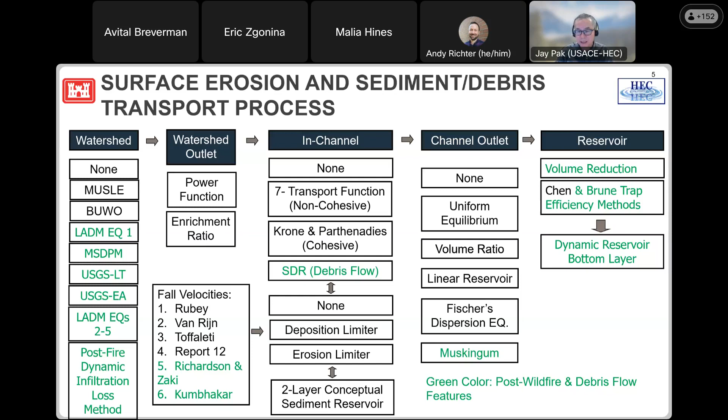And then we can update the elevation-area, elevation-storage curve every time step. Then we can continuously update our volume reduction for reservoir capacity. Okay, that's the overall process. Let me go to the data side.

Data: to simulate post-wildfire debris yield and post-wildfire hydrology, you need rainfall data. You also need topographic data and a soil burn severity map; normally you can get that from the BAER team. Then the soil gradation curve, specific gravity, and density. Normally you can find this information from an actual sample at your site, but if you don't have a chance, you can use gSSURGO data to estimate these values.

You also need gauge data, pre and post, for calibration and validation. And finally, you need the measured debris amount for your debris yield analysis, calibration, and validation. Using this data set, you can fill out the required input parameters.

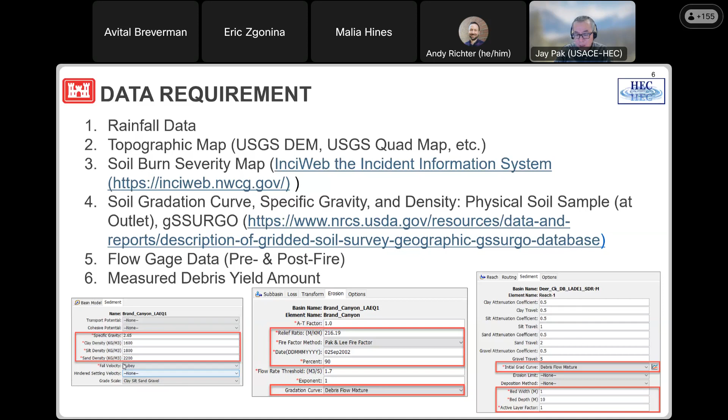From the basin model, go to the sediment tab; you need specific gravity and density for each grain size. For the sub-basin element, in the erosion tab, you need to put the relief ratio, the burn percentage, and the burn date. You also need to put the gradation curve; normally you can find this sample from the outlet of your watershed. Then for the reach element, in the sediment tab, you need to put the reach element gradation curve and also some cross-section information.

How do you get this data? You may have a lot of sources, but I want to recommend this NASA RECOVER site as one-stop shopping. This is a new site developed by Idaho State University and NASA. You can find all the information here: fire maps, terrain data, gSSURGO information, and even rainfall information.

This is a recent fire, the Maui, Hawaii fire. They only cover the continental area, not outside the continental U.S., but I asked them, and they generated the Hawaii fire information too. Check this site first to save your time, and if you don't find the information, then you can go to another source.

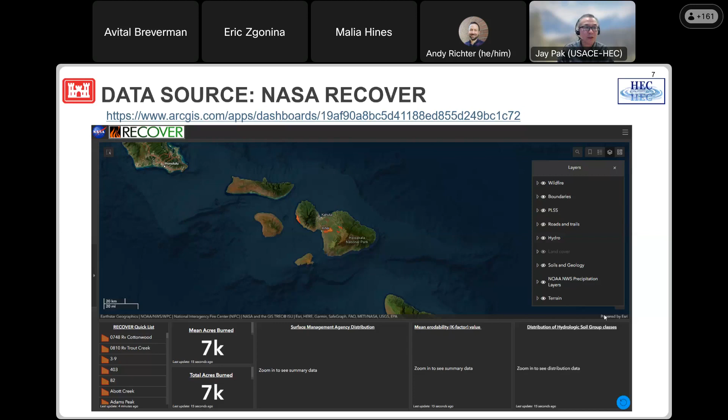This is the GUI for debris yield. If you want a debris yield analysis, go to the sub-basin tab and choose one of the debris yield methods. After you choose one, HEC-HMS generates a specific interface for each method, and you need to put the required input parameters for each method. Then HMS generates the results. This result graph shows sediment volume, sediment concentration, and sediment load, and HMS also generates a summary table.

With this, you can generate input boundary conditions for HEC-RAS. HEC-RAS has two options. You can use bulk flow, which means water volume plus sediment volume, so you can directly link this time series DSS result. Also, from the summary table with water volume and sediment volume, you can generate a bulking factor and put it into HEC-RAS directly.

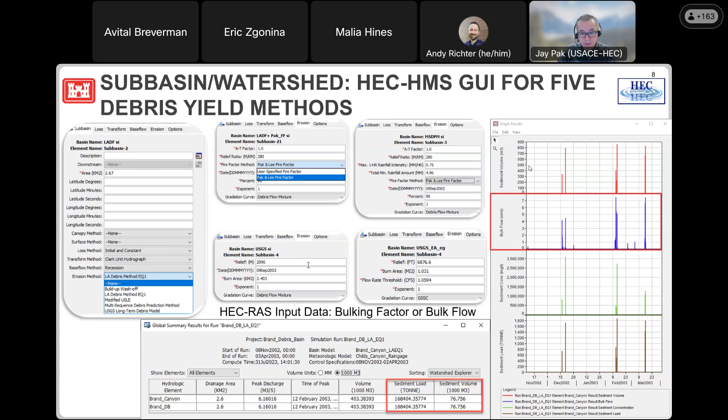The next one is the reach element. Originally we have seven transport capacity functions, but they don't work for hyperconcentrated systems. That's why we need a simple but manually controlled erosion and deposition, especially in steep channels inside mountain watersheds.

This is a simple concept. You have your input sediment amount for your reach, and you can control the sediment delivery ratio to get the outlet. If you choose 1 for the sediment delivery ratio, input and output sediment are the same, an equilibrium condition. Less than 1 is a deposition condition, and bigger than 1 is an erosion condition. That's how you control deposition and erosion inside your channel.

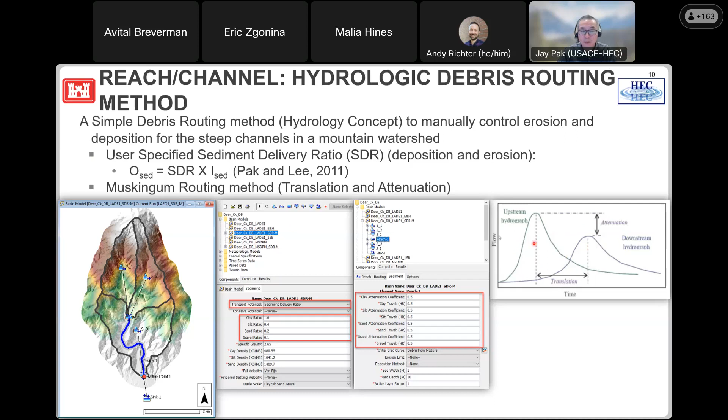This is the interface. Let me use the laser pointer here. In this interface, you can choose the sediment delivery ratio for each grain size to control the volume. After controlling the volume, you want to control translation and attenuation. You can easily control the Muskingum routing method with two factors, the attenuation coefficient and the travel time. So you control attenuation, translation, and volume with this SDR and Muskingum debris routing method.

Next one is the reservoir element. You can see this big picture here: this is the San Bernardino County Deer Creek debris basin, with the debris basin intake tower inside the basin. That is after the fire but before the storm event. After the Christmas storm event, you can see a huge debris yield already filled this debris basin.

We need to simulate this one with HMS, okay? For a large watershed, a large reservoir, this is one example. Horizontal is time, vertical is reservoir volume. Through time, by siltation, reservoir capacity is reduced. But after fire, reservoir capacity is dramatically reduced.

Normal time, and then after fire. During this whole long-term time with the fire, the reservoir is going to lose some capacity. Then we have to raise the dam, or we need some kind of flushing or dredging. But we want to do some simulation with such a model.

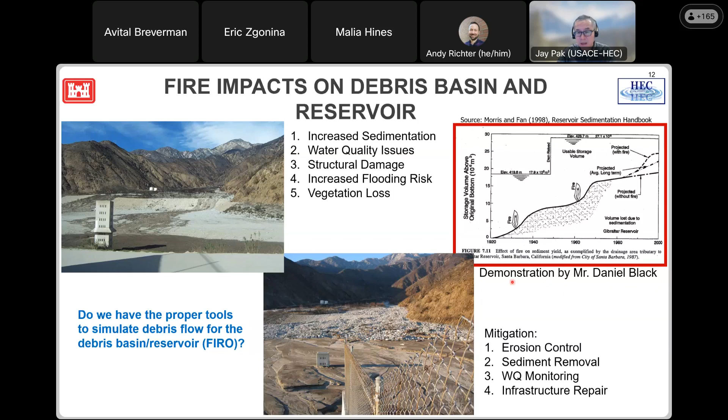Okay, I think Daniel Black is going to demonstrate first for the long-term big reservoir. Unfortunately, in this case study we don't have a fire event, but you can see how this reservoir element works in terms of volume reduction of capacity. This one is the process.

HEC-HMS calculates trap efficiency with the Chen method or Brune method. With that, we can compute the siltation amount and then the updated elevation storage and elevation area curve. With the updated elevation area curve, we can calculate critical velocity and get the updated Chen trap efficiency. With this process, we can continuously update the elevation area and elevation storage curve.

On top of that, we have 2 options for how to update this elevation storage curve, okay? The first one is a V-shape option, meaning it deposits from the bottom. The second option is the elongated taper option, which deposits from the upstream.

For example, this solid green line is prior to siltation. If you choose the V-shape, the dotted green line loses capacity from the bottom. But if you choose elongated taper, like the yellow solid line, you lose capacity from the upstream. You can choose this option by grain size, and then control your elevation area and elevation storage curve to update your reservoir.

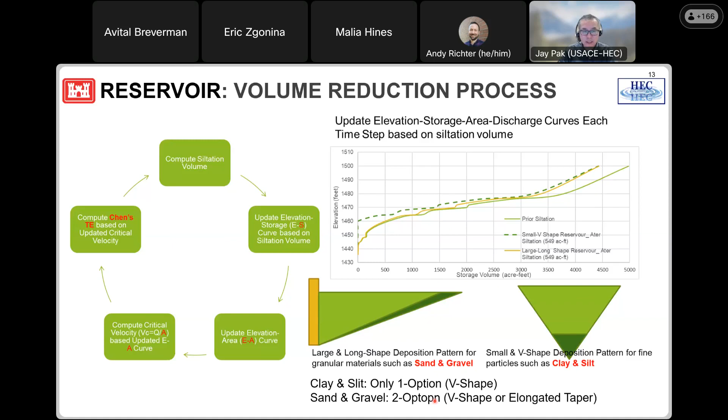Okay? This is the user interface for the reservoir. You can choose Brune trap efficiency or Chen trap efficiency from the sediment method. Each method has its own component editor. You need the required input parameters, and then HEC-HMS generates cumulative debris yield or sediment yield, and the elevation area and elevation storage curve updated monthly.

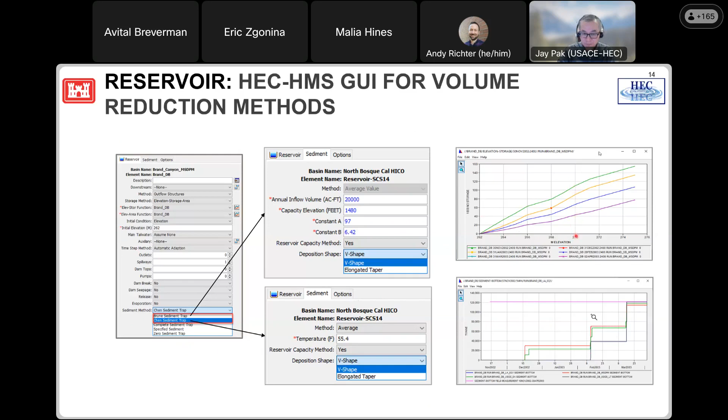Okay, this is one example. We're using 4 different debris yield methods, and with that, HEC-HMS generated the cumulative yield through the whole storm season of about 4 months, and this orange solid line is measured data. Everything is pretty close to the measured, but they differ by event. This one is continuous accumulation information.

Another graph here is the elevation storage curve. The first one is the initial storage curve, and the last one is the final one. We provide the updates monthly. For elevation 270, the original capacity was about 110,000 cubic meters, but after three and a half months, one storm season, you have only 45,000 cubic meters. This much you lose already.

So with this information, you can control debris basin management for future debris yield events based on forecasting information.

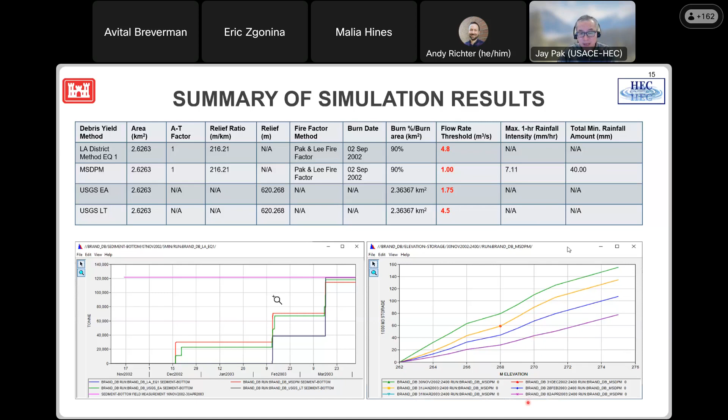This one is the ensemble analysis tool. Many people ask which method is best. Without data to calibrate and validate, it's hard to say which one is better. Normally, in an emergency situation, we don't have a data set for calibration. So as an alternative, you can use all 4 debris methods, and then use the ensemble analysis tool to provide a maximum, mean, minimum range. You can provide this range to HEC-RAS for your non-Newtonian simulation.

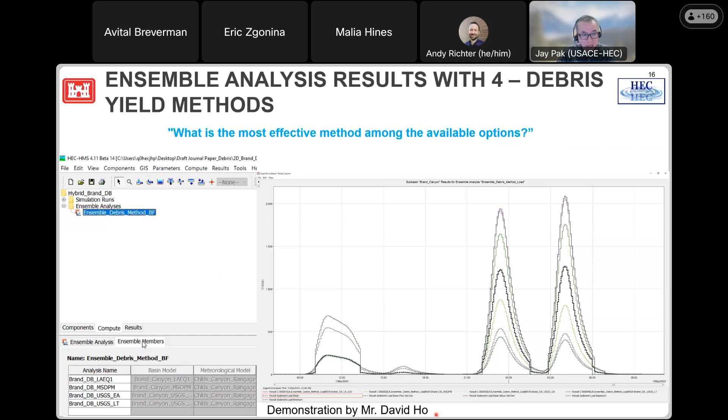David Ho is going to present in more detail with his case study. And this one is another application with HEC-HMS 2D. I connected the maximum debris yield as a bulked flow into a 2D boundary condition, and then generated inundation mapping. But this one is just for clear water.

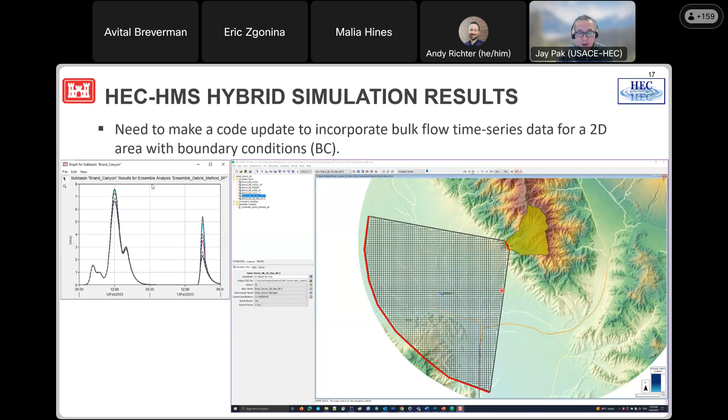It's not non-Newtonian. But before using HEC-RAS, you can get some idea with trial and error, finalize your alternative, and then go to HEC-RAS and make a final non-Newtonian simulation to get your final boundary line for your debris yield.

Okay, the next one is the dynamic infiltration loss method.

This graph I got from the 2020 Brian Ebel paper. After fire, he took some measurements of hydraulic conductivity. The first one right after fire, and the second one 4 years later. You can see that hydraulic conductivity increases from the fire up to a certain unburned condition.

We want to simulate this for long-term post-wildfire hydrology. That's why we add one surface layer to control dynamic infiltration, using this dynamic infiltration loss method. This Ks initial is the initial value just right after fire. But with the decay factor it's going to improve up to the unburned condition hydraulic conductivity. This decay factor is a function of burn percentage, a function of time, and also a function of event. So with these three parameters, the decay factor increases up to the unburned condition.

Let me show you an example here. The red one is with the dynamic infiltration loss. The bottom one is without dynamic infiltration loss, up to 9 years. You can see the first year is pretty close, about 0.77 and 0.7. But through time, without the dynamic infiltration, the Nash-Sutcliffe coefficient is pretty low. But this one is still not bad. 0.2 is not good, but still much better than without dynamic infiltration loss.

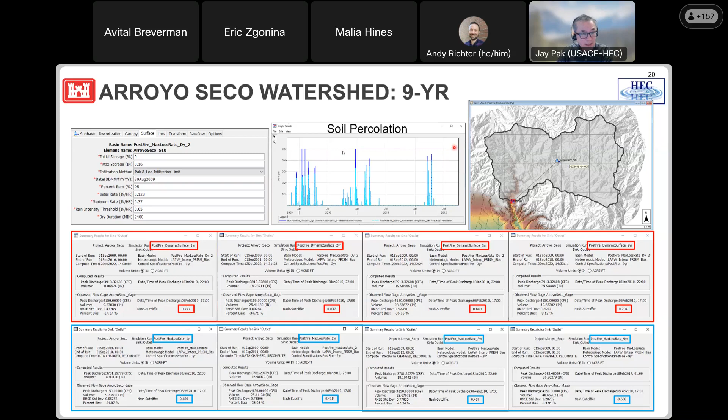Future plan. This year I'm concentrating on this new feature, because for post-wildfire hydrology many people use the curve number loss method, since we have a good guideline from the USDA Hydrology Technical Note number 4. They provide the curve number before fire and after fire, and even after fire they provide minor burn, moderate burn, and severe burn. Many people use that guideline to generate post-wildfire hydrology. But that is not site-specific. That is not physically based.

That's why our soil scientist from CHL, Dr. Shillito, and from DRI, Dr. Berli, suggest this modified Green-Ampt. Modified Green-Ampt just replaces the wetting front suction. This is the original Green-Ampt. They want to replace the wetting front suction value with the sorptivity value using the Philip equation. After replacing it with the Philip equation, we get a new modified Green-Ampt method. That's a function of hydraulic conductivity and sorptivity.

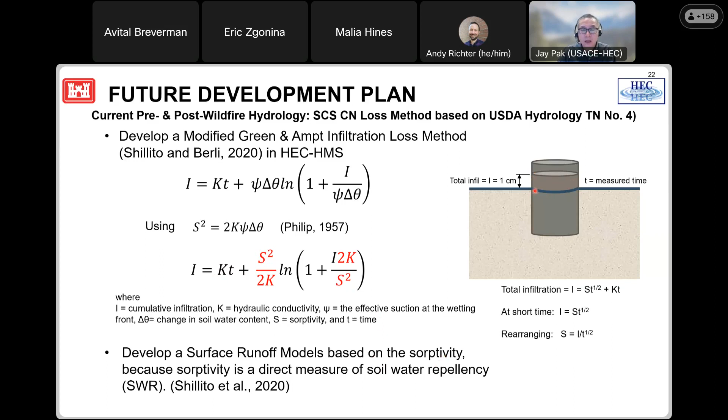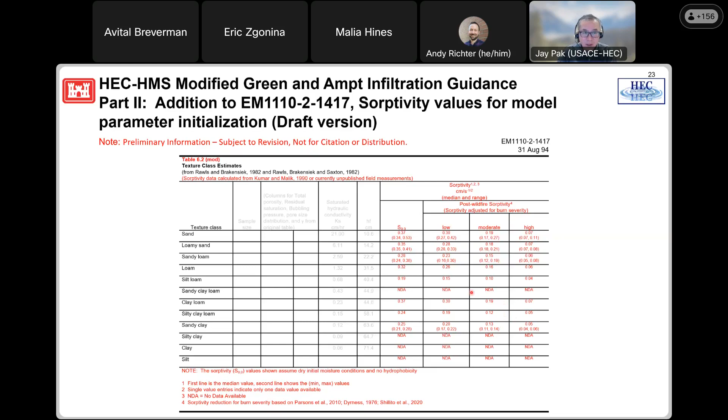Dr. Shillito and Dr. Berli are trying to provide some guidelines based on different soil textures, with a range for the sorptivity value. This is the unburned sorptivity value. This is burned, with different categories: low burn, moderate burn, high burn. But this is still under construction; they're trying to update it. With that, we can provide another alternative way to calculate post-wildfire hydrology and compare with the SCS curve number approach. I think this is my last slide.

Next, Daniel is going to present the dynamic volume reduction application for reservoir long-term simulation, and then David Ho is going to present the ensemble analysis application. So Daniel, I want to hand over to you. Thank you, Jay.

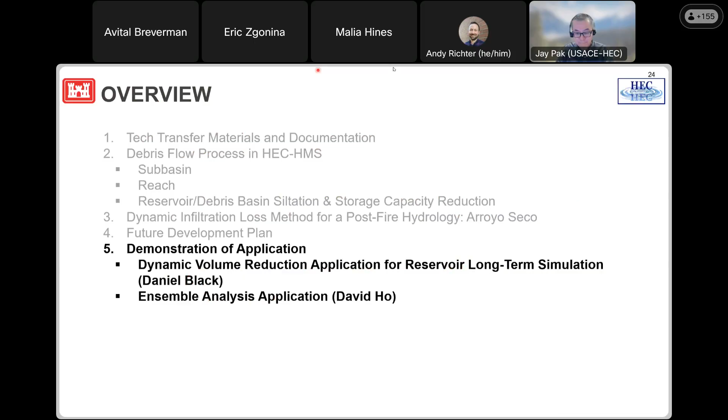So I am going to demonstrate some of the updates that Jay was just talking about, particularly the dynamic reservoir volume reduction feature. What we see here is a very simple HMS model. We have a source element, a reservoir element, and a sink element. We're going to open the component editor for the reservoir, and you can see the sediment method is set to the Brune sediment trap, which Jay was just talking about.

Going to the sediment tab, we can see the component editor for this method. We have these parameters to provide, and two boxes to choose a reservoir capacity method and a deposition shape. The reservoir capacity method is a yes or no option. Setting it to yes will update the elevation-storage as well as the elevation-area curve each time step based on reservoir sediment deposition, and allows you to choose a deposition shape. As Jay was showing, we have V-shape and elongated taper.

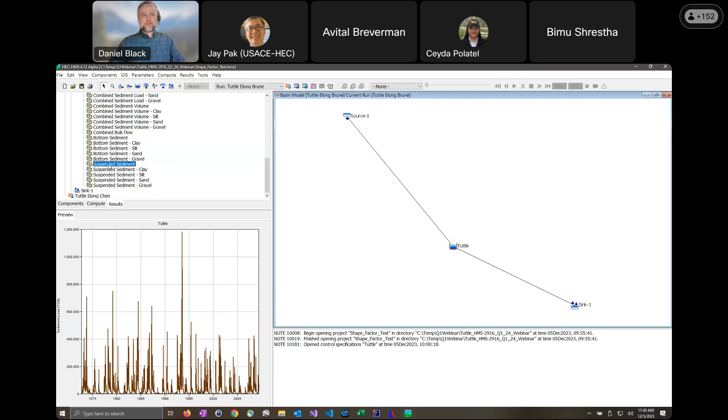The more important ones that we're looking at are the bottom sediment. This is the sediment that gets accumulated at the bottom of the reservoir over time. This particular simulation is a long period of record running from 1972 to 2009, and you can see the accumulation of sediment over time. And then finally, the suspended sediment. This is sediment that is suspended in the column after deposition occurs. This sediment will eventually become outflow or additional deposition given enough additional time.

So we're going to look at the results a little more closely. So I'm going to pull up the DSS file for this simulation. And I'm going to filter down to elevation storage. And here are the results for our elevation storage. I don't know if you can make out the text here. Each record is a 1 month period. Results are calculated monthly by default in order to prevent inundating you with data. A 1 month time step is plenty for looking at reservoir volume reduction.

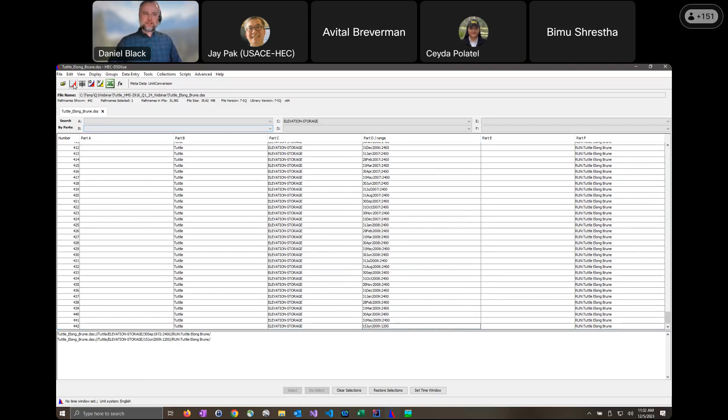So in this case, I'm going to select the first record from 1972 and the last record from 2009 and plot. The green line is our 1972 curve. The red line is our 2009 curve. The x-axis is the elevation given in feet, and the y-axis is our acre-feet storage. So if we look at a point here, say 1,100 feet, we can see that in 1972, our storage was about 909,000. And in 2009, our storage is around 732,000. So we can see that over time, our storage volume is being reduced.

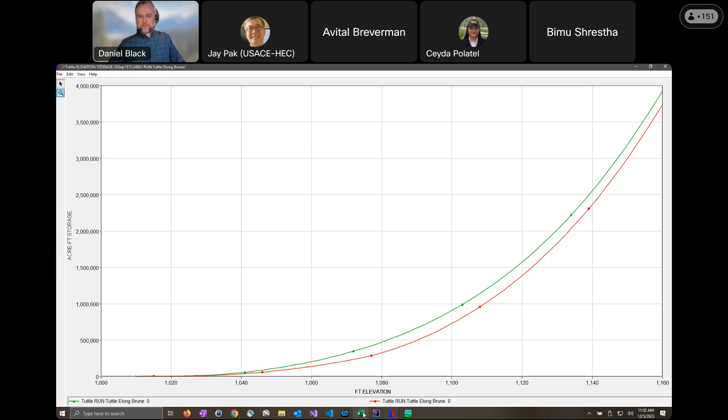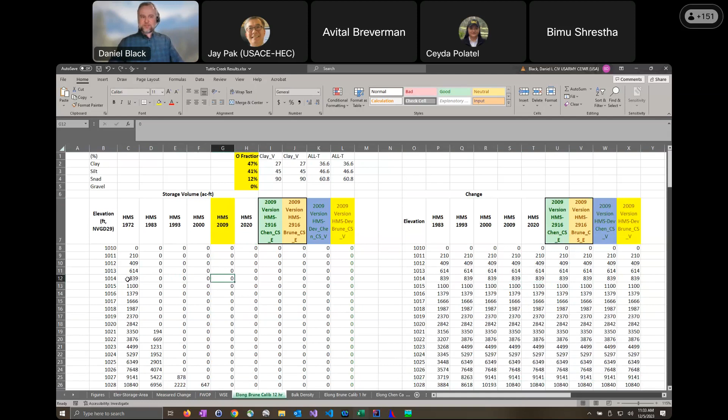Now we're going to look a little more in depth at the data. So I have a spreadsheet. Again, I don't know if it's large enough font to read, but we have two tables. The first table is our elevation storage curve based on survey data. So we have the 1972, 1983, 93, 2000, 2009, and 2020 surveys. And the second table over here is the change. The change is calculated for a given year by subtracting the 1972 volume from whichever volume you're looking at the change for. So in this case, let's say 2009, we would subtract 0 from 839. So that's where this data is coming from.

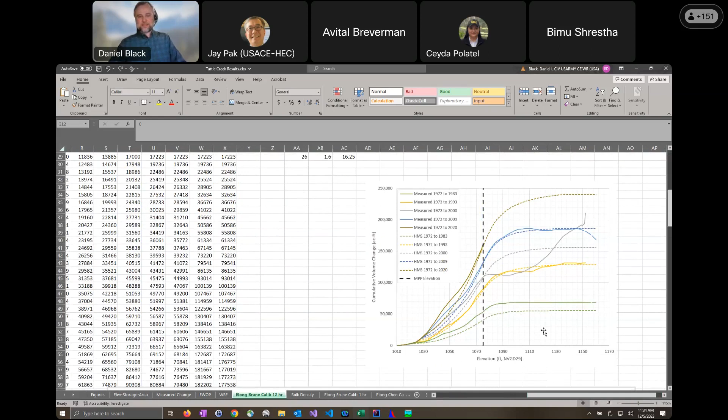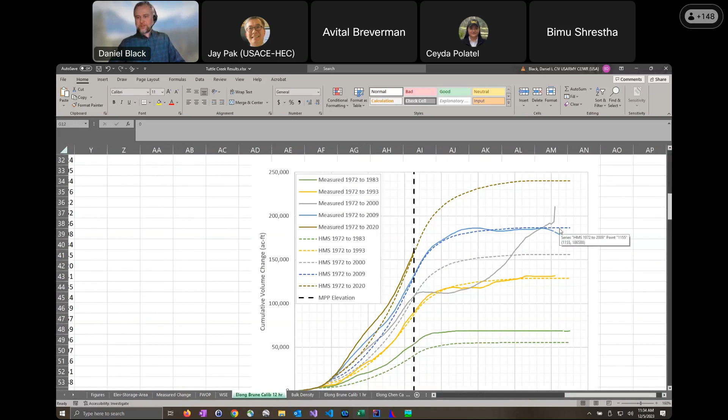This particular graph is just a plot. Let me zoom in a little more on that. This is just a plot of all of the data in the columns we were just looking at. And we're going to focus on the 2009 curve, which is the one in blue here, because that's what our simulation was showing. And let me change this. Okay, so this is our 2009 simulation. And the first two lines that we're going to look at are the blue and green lines over here.

These represent using the current method that's in HMS, the deposition shape, where the elongate method is only depositing sand and gravel in an elongate shape, and silt and clay are still using the V shape. And we can see that these lines do not match very well with the measured curve from the 2009 survey.

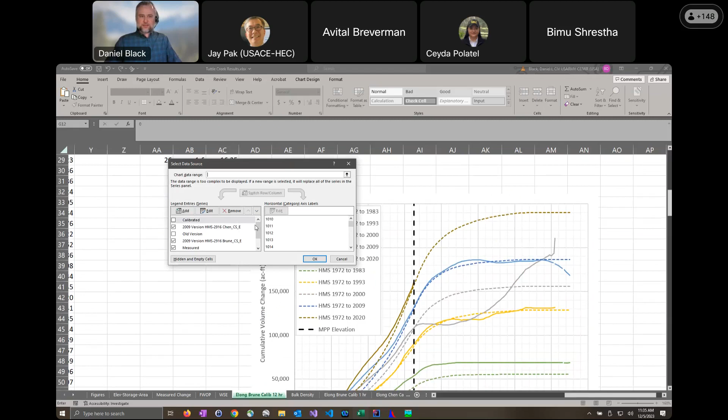So if we go ahead and turn those guys off, so now with the updated code that we are testing out, in this case, the elongate shape, all grain sizes are using the elongate shape, and so the orange line here represents using the Chen sediment trap method. The yellow line represents the Brune sediment trap method, and the green line is our measured actual surveyed data.

And what this shows us is that, with the proposed changes, we are seeing a much improved matching of simulated with observed data. This backs up the idea that having the ability to model grain sizes individually would probably further improve our calibration results.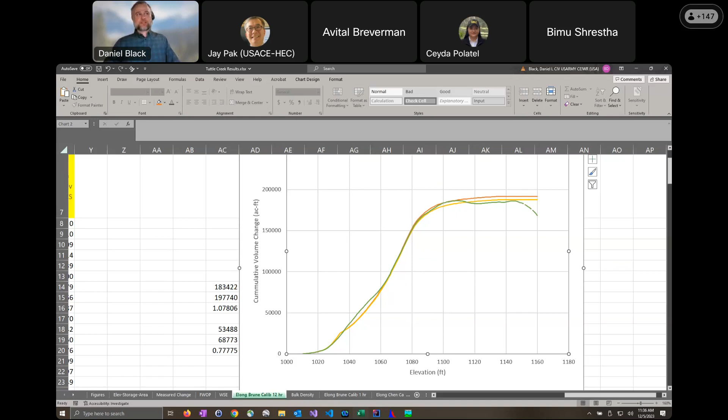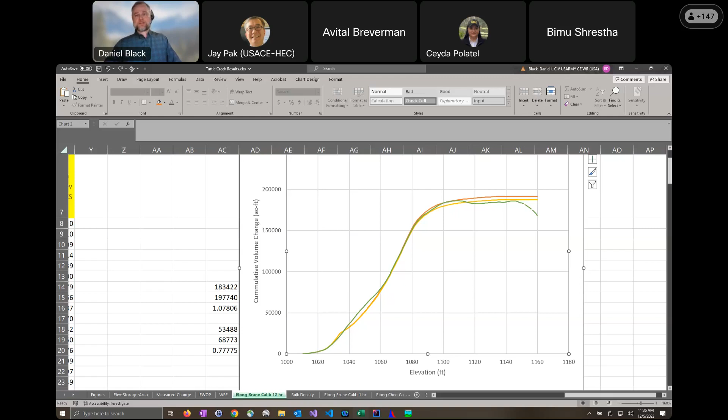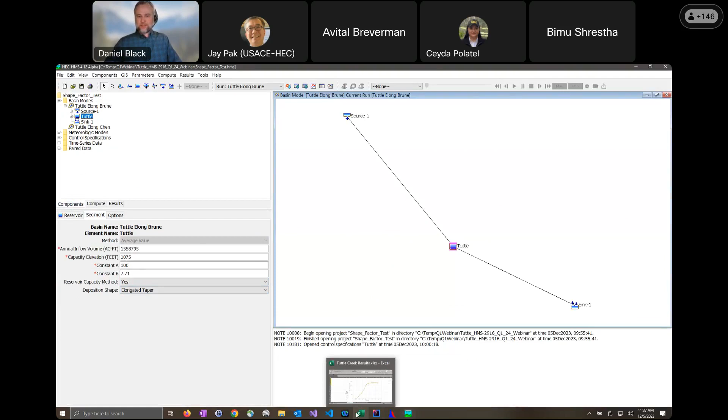So the key takeaways from this demonstration is that setting up the HMS model to model volume reduction is a fairly easy process. Going back to our component editor, this is a very easy component editor to parameterize. These results track very well with the results produced by HEC-RAS.

So I'm gonna pull back. This is not an actual table in here. This is just a screen capture. But the results in blue represent those produced by HEC-RAS. The gray represents HEC-HMS, and you can see that the results track very closely. So there is some advantage to using HMS, given how easy it is to set up the model.

Another important takeaway from this demo is that the model that I'm demonstrating, the long period of record, doesn't include post-wildfire sedimentation. So these improvements are not just geared towards post-wildfire. These can be used in any case that we have a reservoir that we need to model sediment on.

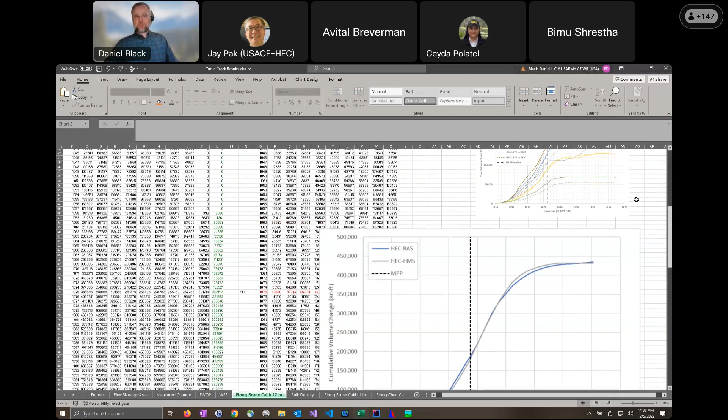And then finally, a lot of this work came about from needs from modelers in the field. Before these capabilities were added to HMS, modelers would have to use a spreadsheet kind of similar to what we're looking at now. Modelers preferred using spreadsheets over setting up a RAS model, and the issue with that is that even an Excel sheet can get kind of cumbersome when you're dealing with 60, 80, 100-year period of record.

So I mean, you can see this table here. It's annoying to look at. It's hard to make sense of. So HMS is a much more concise way of modeling volume reduction. So yeah, that's pretty much the end of my demonstration.

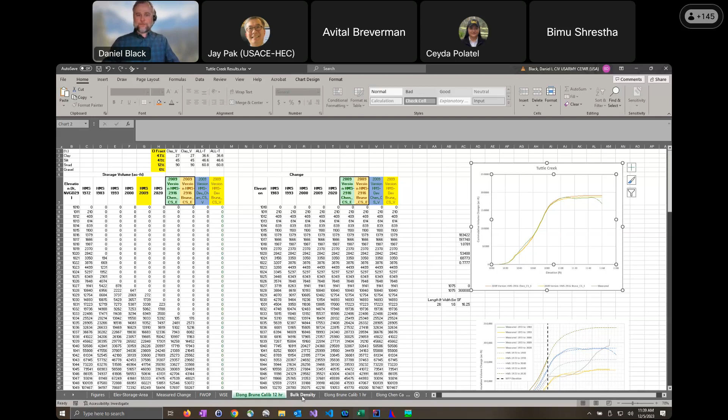All right, so hi, my name is David, and for my demo, I'm going to show how you can use the subbasin debris yield methods that Jay had talked about to generate a bulked flow hydrograph. So Jay had mentioned that we had debris yield methods that can be used to estimate debris volumes. So we can incorporate the debris yield volumes into our clean water hydrograph.

So this is useful if you need to estimate the potential increase in your flood after a wildfire event on your watershed, where previous ways of estimating bulked floods has been simply just to multiply your hydrograph by a factor. You can still do that in HMS, but we can also incorporate the volume of the debris into the hydrograph itself.

All right, so for this demo, I'm going to use the Brand Canyon watershed that's located in Southern California. We have this watershed as well as its tutorials and guides on our Confluence page. So if you are interested in following along after this demonstration, you can go into our tutorials and guide space. It's called Task 2 Debris Yield Modeling Without a Debris Basin. So everything that I'm talking about is actually going to be coming from this tutorials and guides.

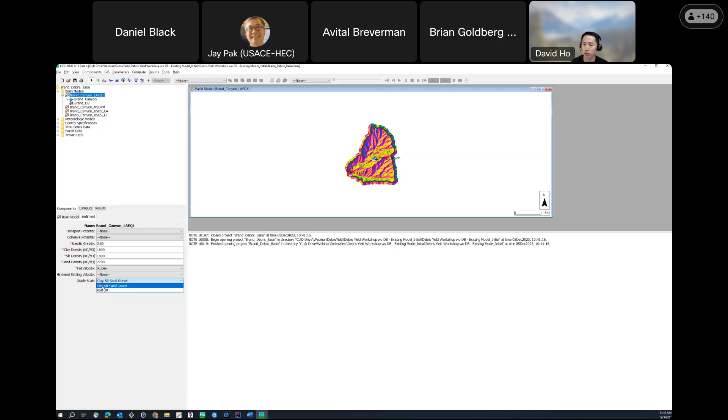All right, so next, we're going to head over to our subbasin, where we want to generate debris yield. So in the component editor, under the erosion method, we have all these different methods to generate sediment. And so we have methods like the modified USLE, which is a very popular sediment equation. Since we're interested in debris yield, I'm going to select the LA debris method.

And when we select that, we're going to have this erosion tab that shows up here. So I'm going to click on here, and here are the parameters for the LA equation 1. So each debris yield method will have its own set of parameters. Although if you were to cycle through the different parameters, you'll see that it's pretty consistent with one another. Our user's guide goes into much greater detail on what each of these parameters means. I'll go into some brief description for the LA equation 1.

So this AT factor is the adjustment transposition. So this is if you apply the debris yield equation outside of its regional area, you would need to make an adjustment in that case. Since Brand Canyon is located within the area the equation is developed, I'm going to stick with the default value of 1. The relief ratio is the difference between your highest and lowest elevation.

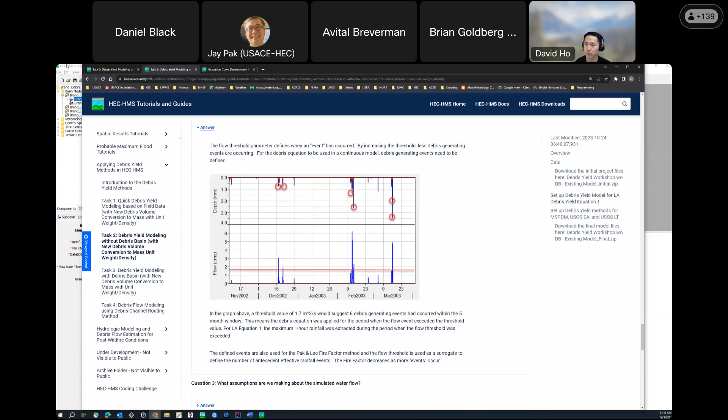So to illustrate this, let's just say that this is our simulation window. This red line would represent our flow threshold. And what it's doing is every time the simulated flow passes this threshold, a debris yield event is triggered. So here, if we were to use this simulation window with these events, we would have 1, 2, 3, 4, 5, 6. So 6 debris yield events generated. So for this demonstration, I'm going to use a threshold of 1.7.

And then our last parameter is the gradation curve. So this defines the grain sizes within your subbasin. So you create the gradation curve through the paired data diameter percentage function selection. So heading over to the table, you see here, you would set the diameters of your grain sizes as well as the percentage of those grain sizes. Okay, so I have a percentage function created, so I'm going to select that.

All right, so at this point, just a comment, you put the 1.7 in the exponent portion, not the flow rate threshold. Oh, thank you. Thank you for clarifying that, actually. That's important because I did miss the exponent. So the exponent, this is also another HMS specific parameter. What this does, it controls the shape of the sediment time series.

So the sediment time series will be the same shape as the hydrograph if you use a value of 1. A value greater than 1 would make the sediment time series peakier. And then a value less than 1 will flatten the time series. So for this demo, I'm just going to use a value of 1. Thank you, Jay, for catching that.

All right, so at this point, I have finished parameterizing my erosion. I've also already set up the parameters for loss and transform. And so I'm ready to just run a simulation.

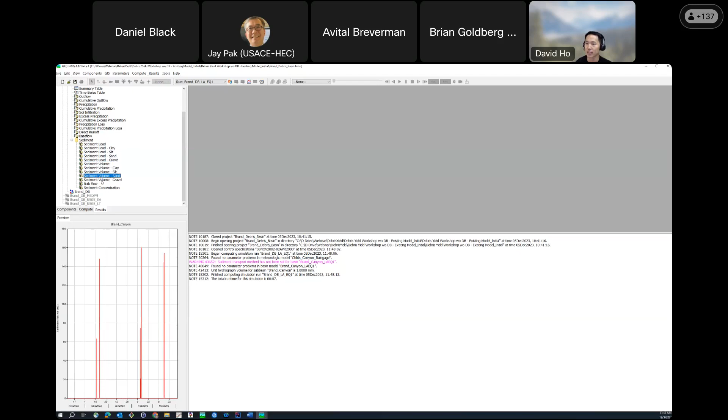The sediment is broken down into weight, so a load value, and volume. And then it's also broken down into its individual grain sizes. So we have results for both the silt, sand, and gravel. You'll notice that for clay that we don't have any results.

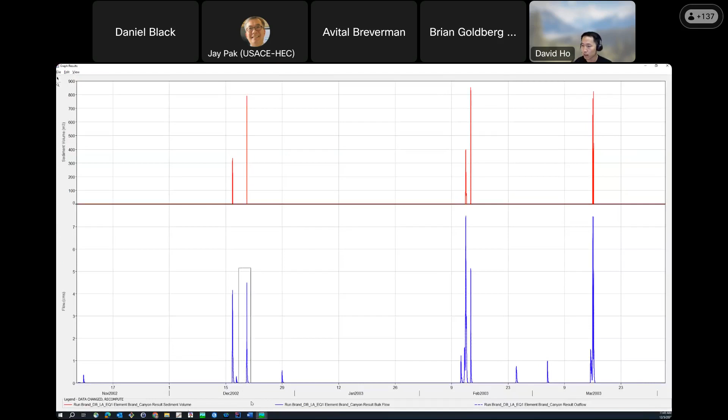All right, and then we can now move on to our bulk flow. So the bulk flow has been mentioned a couple of times that it's a combination of the sediment volume with our clean water flow. All right, so expanding this, what we're showing here is the clean water, which is shown in this dashed line. The bulk flow is the solid blue line, and then the sediment volume is represented in this red line.

So as you can probably tell, the bulk flow is taking the sediment volume, converting it into a rate, and then adding it to our clean water. And that gets us our bulk flow value. So what you can do, as has been brought up by Jay, is you can take this bulk flow and you can pass it over to your hydraulic modeler for them to model the flow as non-Newtonian.

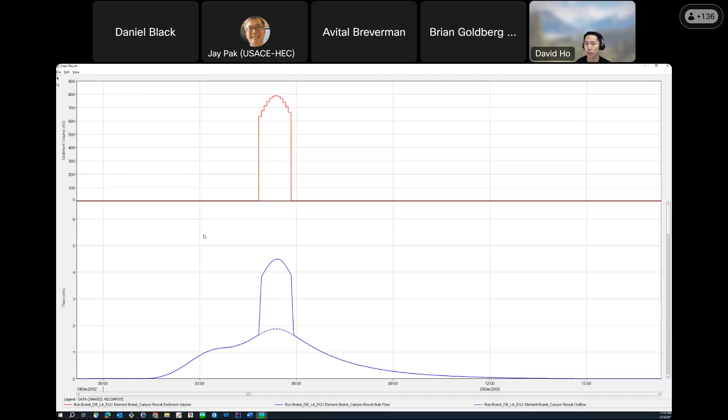As has been brought up, you can calculate a total sediment concentration that you can also pass over to your RAS modeler if that's the preferred input for them. So to do that, we head over to the global summary. So I clicked on the global summary, and then we got this global summary table that showed up.

So I'm gonna switch it over to meters cubed, and so you can get the total sediment volume from this table here. So here is the sediment volume, and here is the clean water volume. And to calculate the sediment concentration, it's simply taking the sediment volume and dividing it by the clean water volume plus the sediment volume. And you'll get a % concentration, which you can also pass over to your RAS modeler.

Okay, the last thing that I wanted to demo is the usage of the ensemble compute type. So as mentioned by Jay, a question that we do get is, which debris yield method should you use? So the answer, like all good answers, it depends on your region and your use case. The debris equations are empirically based and will depend on your location, data availability, and your time duration. There are times, though, where this answer is not as obvious, and each method could be equally valid.

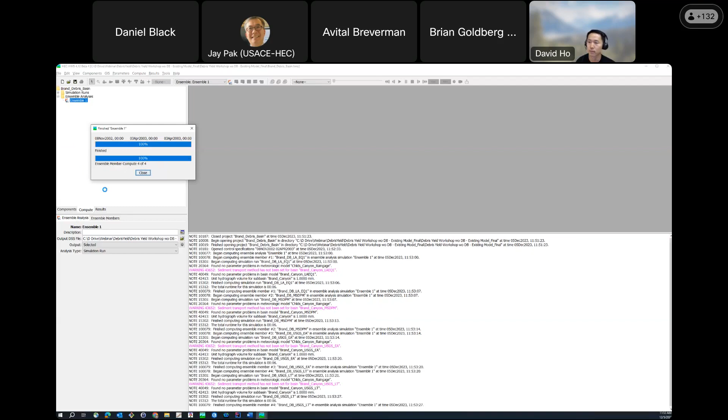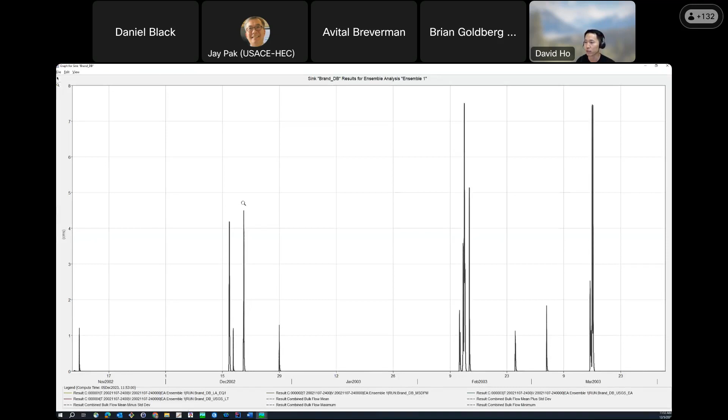All right, so we've finished the compute. So we can now take a look at our ensemble results. We had only selected the combined flow, which is why we only see combined bulk flow. But we can see here that it's computed each of the simulations. But in addition to that, it's also computing some statistics for us. So it's computing the mean of all of the computes, the mean plus standard deviation, a mean minus standard deviation, as well as a min and a max.

So how you can utilize this information is you can provide to your RAS modeler a min, max, and mean value, which can represent your best case, your worst case, and your most likely case. Or, if your RAS modeler is doing any type of calibration on some type of stage, you can tell your RAS modeler, hey, here's my hydrographs. You're allowed to make adjustments to the bulk flow between this min and this max value, right? And that way it gives them some range that they can use for their calibration effort.

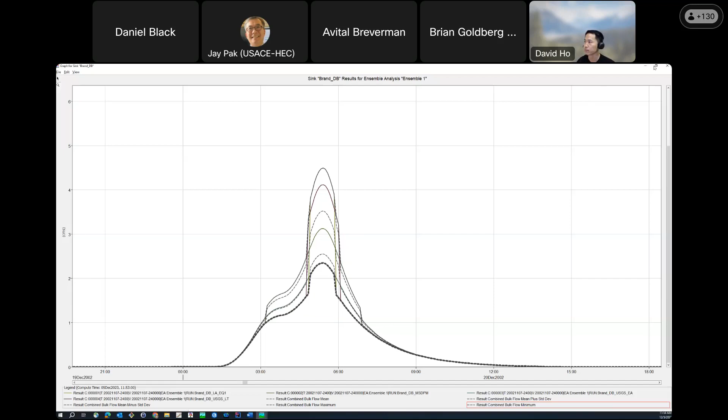Right, and then one last thing that I wanted to show was our ensemble viewer. This is a new tool that is going to be available to you in HMS 4.12. This viewer allows you to view ensembles and different metrics. To access the viewer, you simply go to Tools and then Ensemble Viewer. When you click on this, this viewer should show up. So I'm going to navigate over to the DSS file where our ensemble analysis was computed.

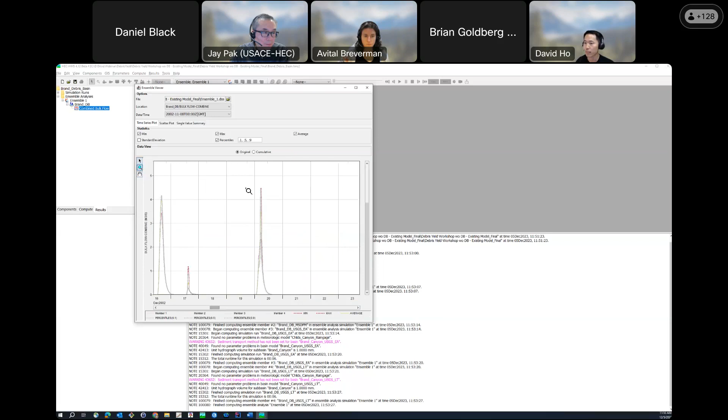Give me a moment here. There we go. And so this is showing the same results that we just saw in HMS. So it's the 4 different debris yield methods. You can compute the min, the max, and the average, very similar to what you had just seen in HMS. But what's unique about this is you can now select your own percentiles. So let's say you wanted to see what the 10th, the 50th, and the 90th percentile was. You can compute that, and you can see those results in the viewer.